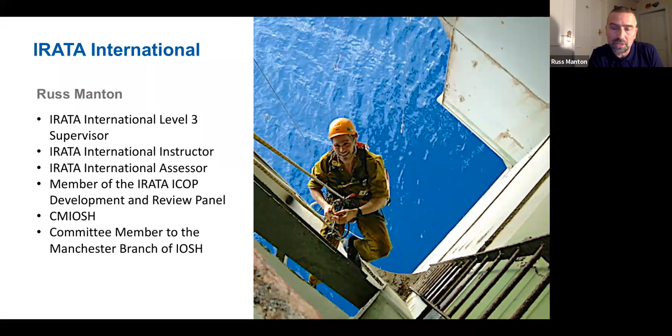So what is industrial rope access? Well, it's really an amalgamation of climbing techniques and caving techniques. That's what it's all about, really. And I've got to give the nod to the caving community here, because there's quite an important thing here.

I was told in the early days, with climbers, they tend to use their physical prowess to go up a rock face or a mountain, and the equipment is a form of mitigation. So it's there in case they fall. So they're not really using the equipment, it's only in case they fall.

Cavers, to progress around a caving system, are reliant on their equipment. Caving systems generally are full of water, running water, silt, mud, and are physically very difficult to climb. So they're reliant on their equipment to move around and progress. With that in mind, they became very proficient at going up and down the ropes.

What rope access has done is take that to one side and hone this technique, what's called single rope techniques, going up and down the rope, and they've added another rope with it, or a line as we call them, where we can put this attachment on in the highly unlikely event of any failure. Basically we've got this redundancy system.

So that actually ties in with the Work at Height Regulations. It actually comes under the banner of work positioning techniques. I'm not going to go through quoting all the regulations, but basically work positioning traditionally has always been about this fall arrest system, and we're adding a work positioning belt so we can go hands-free to carry out a job.

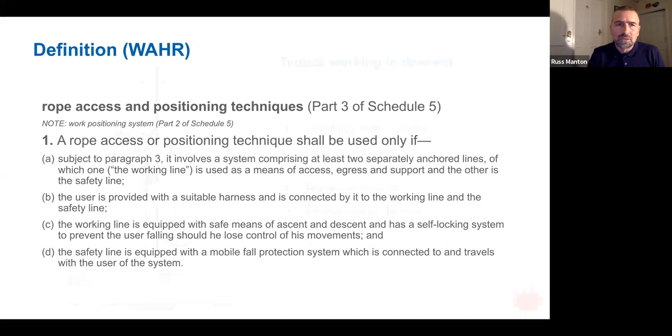It's a backup rope basically, with a device that will run up and down. And as I said before, in the highly unlikely event of any failure of the main working line, the backup system will kick in and arrest a fall.

Now, before we go any further, people think the rope access guys just go into the job thinking it doesn't matter if something happens, we've got the backup. The last thing you'd want is your primary rope to fail whilst you're hundreds of feet up on a structure and going into an uncontrolled descent. Sure enough, the fall will be arrested, but that's the last thing we want.

So with the actual working lines, we go to the nth degree to protect those so there's no failure whatsoever. That's why we say it's the highly unlikely event. We're putting these massive safety margins in. I've found myself in a few situations where we're working on two, three, or even four ropes to get into a position and put all the redundancy in place. It just goes to show how much we put in place.

So we've got working lanyards there, device lanyards, where we can actually attach onto the different lines, so if we need to move from one set of lines to another, we can get across safely while maintaining all these points of attachment.

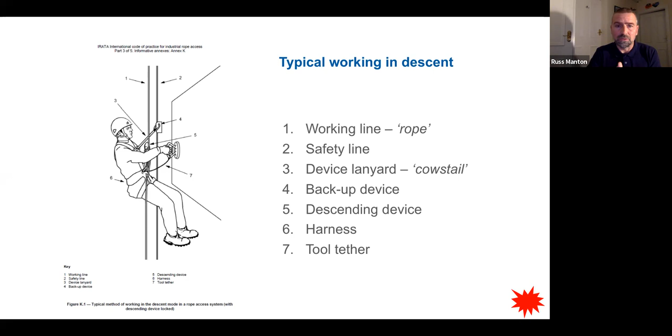So we might be working over water, we could be on bridges, oil rigs and things like that. We've got to be able to ascend up the ropes. It's not simply about just coming down the rope and doing a job, it could be climbing back up. Obviously if you're working over water, you're not going to go down into the water, so what we'd have to do there, we'd have to climb back up the rope.

So what we're doing is putting these two rope grab style devices onto the working rope, and we exchange the actual descending device over with these, a combination of actually two rope grabs. One's attached to the harness, one's attached to a lanyard, and in turn attached to a foot loop. So by using these combination devices, we can progress back up the rope.

And you can see just next to the working rope and the working line, we've still got the backup line. That remains there pretty much doing nothing, hopefully remaining inert, nothing will happen. But that's always with us in mirror image of what we're doing, going up and down. So the technique itself is called SRT, single rope technique, and the actual backup device has been included on top of that to give us this 100% redundancy. So we've got this complete coverage backup system.

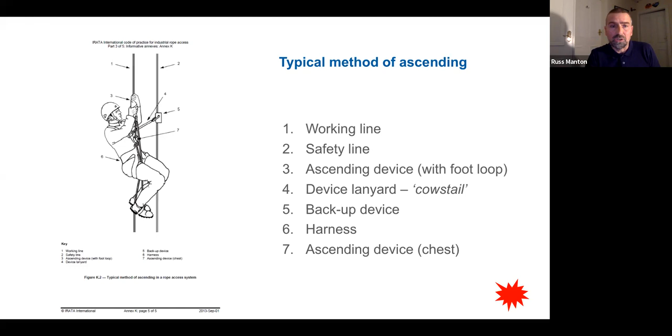Other harness-based work we can do, we're not simply just climbing up and down the ropes or moving up and down the ropes, we can traverse off the ropes. So we're using a technique here called aid climbing. What that's actually doing is it increases our repertoire where we can get to. So if a client came to us and said, look, we get down to this point, we need to go off sideways into a structure, then that's where we'd use this.

This would probably come from the climbing world more than the caving world, where if something's physically too hard to climb, we're reliant on the equipment to hang in. It puts us into work positioning. It's actually a very, very effective system. We're still using the two points of attachment, and in some cases up to two, or certainly three or four points of attachment when we're getting past obstacles.

And the beauty about this system is you're actually in work positioning all the way along, so you're physically not actually climbing the structure. In the highly unlikely event of any equipment failure, the free fall you'll receive, or an end user will receive, is going to be no more than 500 millimeters. It's actually tucked right down, so that'll beat any fall arrest system.

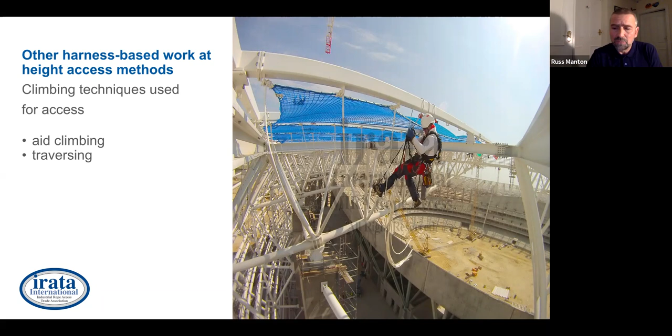And with this, predominantly we are traversing, I would say horizontal progression in a lot of structures. You can see it has been used on a stadium, but in some cases you can actually go diagonally, and basically vertically, any direction you want, as long as it's safe and you've got all the attachments there. Now this will use rope to actually get onto the structure, to move around, and at the end of the day we'll use the ropes to get back off it. But to say, it does really open up what we can do as an industry.

Also included in that, it's not just limited to abseiling, ascending, and the aid climbing I mentioned. We're using the more traditional methods where it's fall arrest, work positioning, and work restraint as well. So within the IRATA system, we're always working with this hierarchical approach, okay?

So with that in mind, the work restraint, or travel restraint as some people call it, is basically that will actually stop us going over an unprotected edge, and that's a really heavily used system. So when we're actually training this, and when we're actually using it on site, that's something we'd always go to. It's the go-to method. Obviously we're there in a place where we're using the PPE to do the job. It's already been accepted that we can't use other methods. We're using the PPE, and this is the first port of call to use when we're using a harness-based system. Work restraint will actually prevent a fall from occurring in the first place.

Sometimes fall arrest systems are used for the primary access, and it's basically just to get into position. And once that technician has got into position, then basically we'll set up a more improved system, or something a bit more permanent, semi-permanent, and effective to get technicians up and down into the structure.

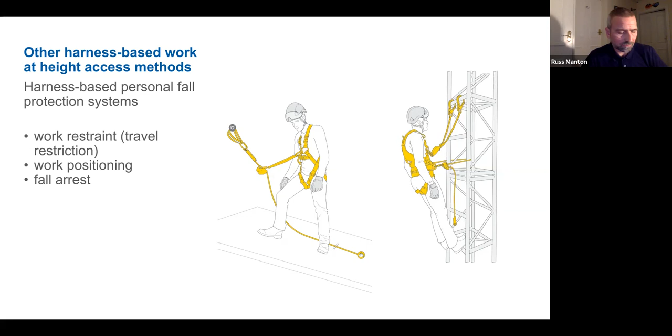Okay, so I like to use the words application specific. You've probably heard this in health and safety terms. The rescue you choose or pick for the job is dependent on the location, the type of work you're doing, and the environment you're working in. And we've got to choose that carefully, and that's down to risk assessment.

All technicians are trained in the basic intervention style rescue, and to be quite honest, that actually covers more ground than any. Most situations will find themselves in descent on a rope, and all technicians are capable of doing that. If it starts to get more technical, then obviously the team competence will have to be upped for that. But simply, we can't go into the job into a difficult location and not expect to get somebody out or evacuate them out. So that's why we train for these all the time.

The next one is this pre-rig system, or rig for rescue as we call it. So the difference between this and the intervention style rescue: in intervention, the rescuer will actually come down to the casualty, pick them off the ropes and take them down. With a pre-rig system, you're actually remotely effecting the rescue. So you can do it from a point of safety.

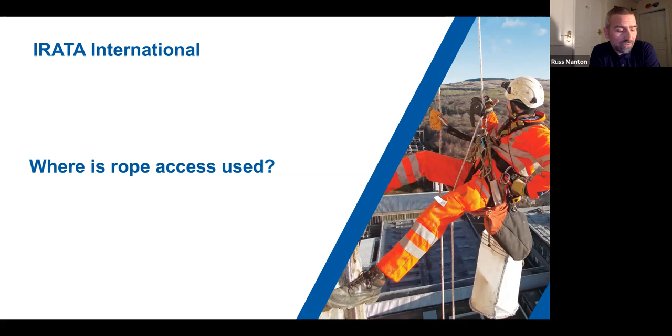One large example, as I say, we can actually compartmentalise our industry and where it's split up and how people are specialising. One big part of it is actually inspection. This particular slide here is a technician who's come down a structure and they're carrying out what's called NDT inspection, non-destructive testing. So this is something I've been involved in over the years.

Non-destructive testing is utilised in loads of different industry sectors. We can use it for offshore, onshore, bridges, aircraft hangars, boats, you name it. And what they're doing is actually coming down, as the name suggests, we're not actually taking samples, but we need to be there right at the structure to do this testing. So they're using ultrasonic methods, radiography, and we can actually tell the thickness of certain structures. It might be part of an inspection program and an inspection regime that they've got to maintain these structures, and that's a big part of rope access.

So you can see this technician has come down, locked off the descending device, and got into a work positioning location. They've got hands free to carry out the work safely, and they can get into a number of locations really quickly and safely as well.

Bosun's chairs is something that's cropped up over the years, and people ask why don't we use bosun's chairs? Because that's a very traditional method. It takes a lot longer to set up, and it's quite limiting in what you can do.

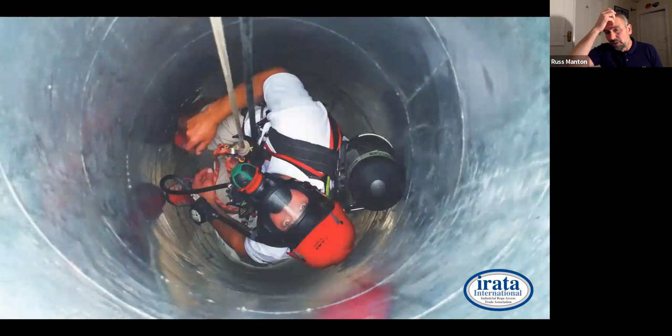Confined space works is something I do a lot these days, and rope access comes hand in hand with confined space. You can see this technician here has actually been lowered down with full BA into a high risk confined space. We can get that technician a lot further into the confined space and extract them a lot quicker as well, so we gain a greater range of what we can work in.

Added advantage of this, the whole team's fully versed in the equipment. They're using this stuff day in, day out. So when it comes to an emergency, they've got a complete understanding of the situation, and they'll all be able to swap around and use the equipment.

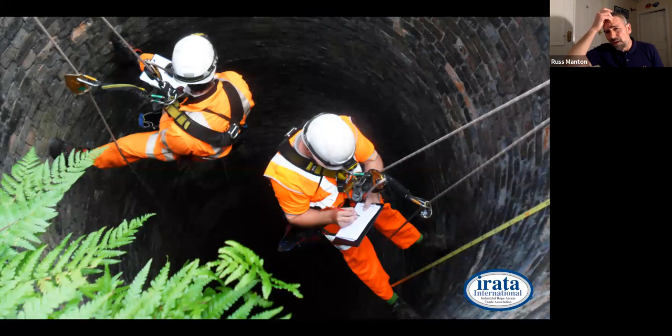Another example of confined space application with rope access is this ventilation shaft. A lot of people ask, why don't you use CCTV for this, or UAVs and drones to go into confined spaces? But there are still limitations. You've got these two abseilers coming in, and they can go down under their own steam, with control of the descent, unlike the picture before.

If you're going greater distances, it's probably a more efficient way of doing it, because these guys are qualified in what they're inspecting - they're engineers who know what they're doing, and they can control the rate of descent as they go down, covering more ground efficiently. Other advantages: they're next to each other so they can rescue each other, and they'll have a topside team as an additional backup to get them in or out of the confined space. It's not always about rescuing down - in a lot of cases, especially confined space, it's about rescuing up as well, so it's a very effective method.

Also, if there's any loose debris, an advantage is you've got somebody actually at the location who can remove that debris and perform a safety check while they're there, which is a bonus. Don't forget these ventilation shafts run right down onto rail tracks, and if you've got loose debris coming down on a moving train, that's a major issue. So that's one of the reasons we do these periodical inspections of the shafts, to make sure they're clear of loose debris - and we can remove stuff while we're there doing the inspection.

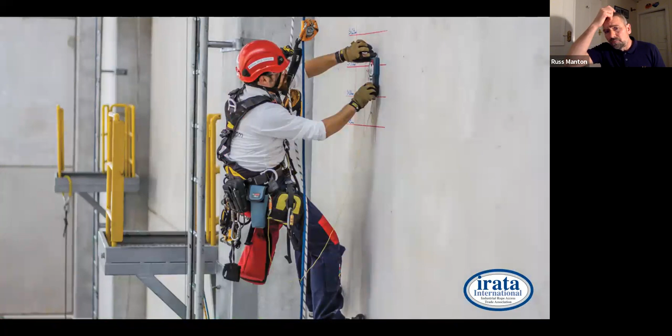Installation work - in this picture, this technician is installing something for a more permanent system to go in place. They can come in, put all the installation points in, and then the engineers can come in and simply install the ladder system that's going to go into place. You can see again, hands-free - they've got total control of the situation to carry out the work.

If you look at the slide carefully, you can see the guy's got this small seat. It's not exactly an armchair, but it provides enough comfort so they can stay there for a longer duration. Work positioning is generally designed for short duration use, maybe 20 to 30 minutes, but with the work seat we can increase that time, depending on what the technician's comfortable with. The work seats, or comfort seats as we call them, are mainly to take the weight of the technician out of the harness a bit more.

All the same safety systems are staying there - they're all rigged in with two points of independent attachment. So the comfort seat's really taking the weight out of the harness a bit, so we don't have any long-term physiological problems occurring with the technician. Other things - you can actually hang all the equipment off the seat as well, setting up a miniature sort of workstation, which is a quite useful way of carrying out engineering jobs and installation works.

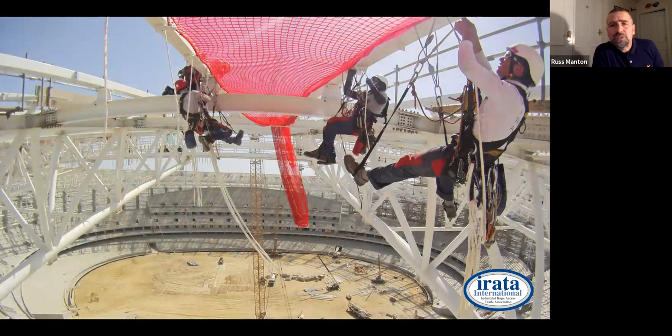Going back to the aid climbing here, this was a team of climbers that have come out onto the structure. What they're actually doing is putting safety nets in for a contract out in an Arab Emirate country. I think it's probably Qatar, actually doing a lot of stadium work out there at the moment. So they'll climb up, they'll probably use the ropes to gain access to the initial structure and from there traverse out. You can see they're taking ropes with them as an umbilical system so they can pass equipment in and out to the technicians from the ground below.

And also in the event of any rescue, we can actually get the technicians off. They're all working in close proximity. And what they're doing is setting up this more permanent safety system for other workers to actually come and do the roof. So going back to what I said before, we're actually working alongside a lot of more traditional access methods, helping and aiding to install these.

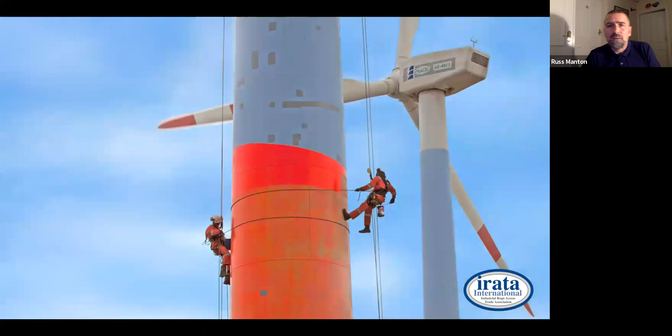Again, we've got another picture here. You can see specialist coating work going on to the wind turbines, actually on the tower itself. Now, this will be done externally as well. I've done a lot of internal and external work with this. Mainly, I was involved in fitting out systems or doing installation repair work inside the turbines in the early days when they first went up.

So we could actually climb up and then abseil down the inside of the tower, the actual wall of the tower. These technicians here have come down the outside. They're doing specialist coating work. Generally with turbines, they've got a 25-year lifespan, and they really start to earn the money after they've been up a few years. So the clients are really keen to maintain them. So, as I say, rope access has been a big player with this.

They're very difficult to actually access. Otherwise, there are cradle systems out there, but they'll take too long to set up, and they're not that effective at the end of the day. Plus, there are one or two huge cherry picker style devices, these mobile elevated platforms that are mounted on boats that can go out to the offshore platforms. But again, there's only a handful of them globally, and they cost a lot of money. So rope access is the next best bet, really.

So you used a lot of civil engineering here as well. So I'll go back to my point with the drones. I'm not knocking drone work in any way, but if anything, as I said, we work alongside drone teams a lot to actually look where we need to be, and then we're sending techs down on the end of the rope to actually carry out the work. Because more often than not, you actually need somebody at the end of the ropes to carry out the work.

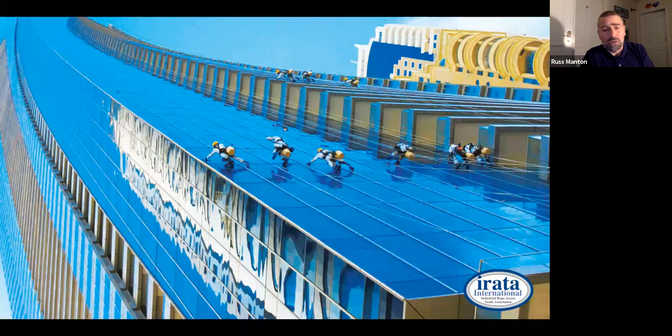Cleaning. There's quite a lot of companies get involved in this. Generally, modern buildings are equipped with BMUs, or building maintenance units, bespoke ones. So the Gherkin and buildings like that will have bespoke systems. They're really, really expensive to maintain. They can also break down, and you can get a team of abseilers in to cover. You can see that this team here in particular have actually covered quite a large area. So if the cradle system's out of use or damaged, you can get a team of abseilers in there to do the cleaning work.

Rope access does have its limitations here, though. I'll give it that. So you can't simply throw a rope off a really tall building and think, right, it's okay, the abseilers can come down and they can get the lift back up. It's not quite as simple as that. When buildings start to get to a certain height, or the abseils start to get to a certain length, the ropes themselves will have a limitation. It's not a safety thing, it's more to do with we just lose efficiency. The ropes elongate very slightly, a very small percentage.

So if you've gone for over a 150-meter drop on a building, 200-meter drops, which I've done myself, you'll start to find the rope elongating. Plus, if you're pushing against the side of the structure to clean it or carry out whatever work you're doing, you find yourself very quickly drifting away from the building. So you end up really fighting against that and having to use other techniques to keep attached to the building to stop you drifting away. As I say, it's not a safety issue. We're on two points in suspension, but it's to actually keep us at interface with the building to carry out the work. So that can slow us down somewhat.

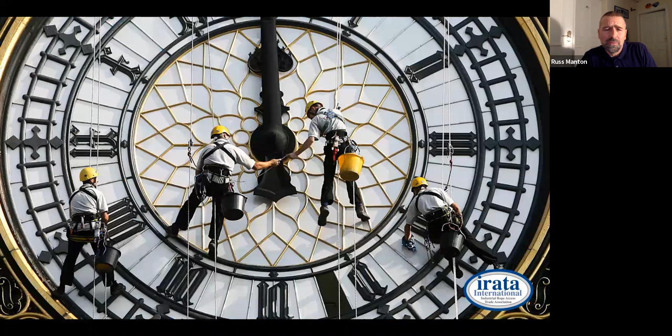I mentioned before about the setup time. It's very quick and easy to set up. It's not invasive whatsoever. And the equipment we're using is really lightweight. There's a lot of alloy components, and these abseilers are not the biggest guys, so they can just basically come down very gingerly, come across the clock face then to carry out intricate work on structures like this. So again, that's been a bit of a bonus.

There's just a few examples there of how we've used it. Obviously, it's used in the entertainment industry and things like that as well. There's lots of different applications. It's just to give you a bit of an idea. So IRATA, I'm going to talk about this, the body behind it all, what their involvement is, what they're about.

So it's the Industrial Rope Access Trade Association. It's a trade association that was set up initially by the initiative of the companies that were doing rope access back in the early days, in the late 80s. They had to set this trade association up to kind of govern what we were doing, set up a syllabus to work to, set up a set of guidance and industry guidance notes that we could work to.

So the structure in itself, it's mainly made up of committees. It's a non-profit certification body. We've got a committee chairman, various committees there for training, health and safety committee, equipment standards committee. We've got the executive committee as well, the overarching committee which makes the decisions. General manager and secretary. The head office is in the UK. It's based in Kent, where all the administration is carried out, worldwide operations, for all the member companies worldwide.

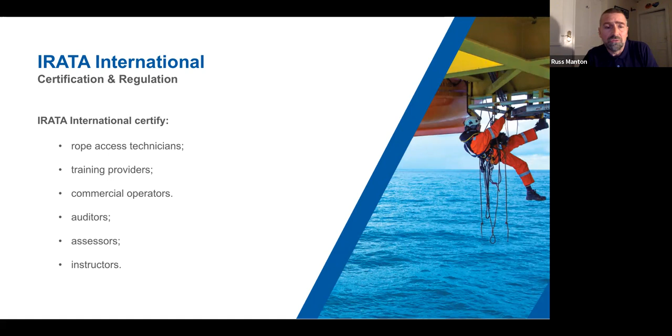Objectives of IRATA: obviously promote and maintain high standards, the work quality around the globe for industrial rope access, promote continuous improvement and education, again through their website. They do a lot of videos and publications that they put out there on the website and disseminate around all the member companies. Increase awareness of the advantages of rope access. Promote the advantages of using IRATA certified companies.

And currently they're actually working towards the ISO standard 17024, which is to do with certification. So they want to get this ISO accreditation as a certifying body. That's been worked towards, and we're almost there with that, getting that over the line. So they're continually supporting the industry globally, working with government bodies, providing advice to industry.

Got very close links to the HSE within IRATA. We've got a couple of HSE guys that actually work with us. So we've got a very good working relationship there. The British Standards Committee as well. The chairman is currently one of the core members of PH5, the Equipment Standards Committee for personal fall protection equipment. So we've got close links there.

And again, the information is coming backwards and forwards with these committees. I know they get involved with a lot of events for health and safety, HSE-based events, predominantly for the work at height side of it, but obviously they get involved with all these events.

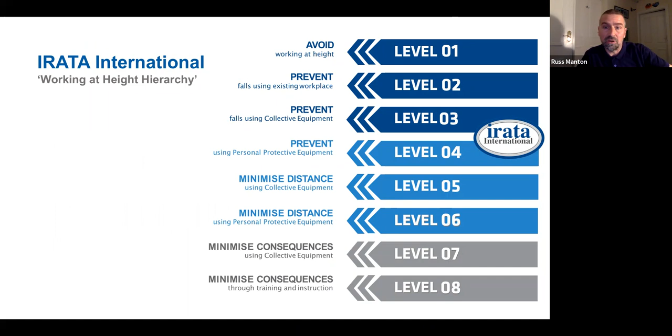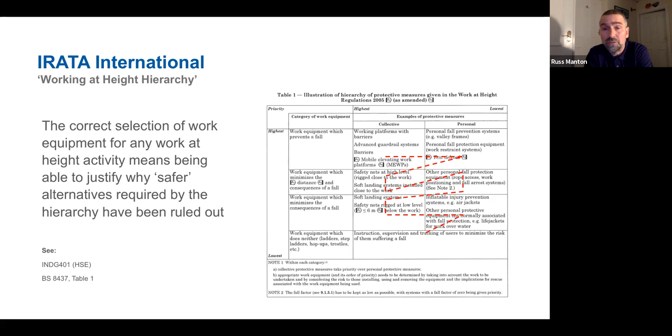Tied into our code of practice, which we'll talk about in a bit more detail in a sec, it actually states in there, and this ties in with the BS 8437 selection of work equipment code of practice, that we've got to look at all other means of access. We've got to justify why safer alternatives have been ruled out before we use rope access. We can't simply just shoehorn it into the equation. We have to do a very careful risk assessment and look at all options. Usually when we're brought in, as I say, it's for the snagging work or for when it's just simply impossible to use other methods. So we're up there with a harness, sticking to our hierarchy.

So the evolution of rope access, where we've got around the globe, it's come a long way. Back in 1988, there were 6 companies in the UK. That was it, working out in the North Sea for the oil companies. Now, presently, we're looking at 606 certified companies globally. You can see a lot of them around Europe. You can see the spread all the way around the globe there, operating and training for that matter.

So as I mentioned before, when I was assessing, I've seen this firsthand, the way it's actually migrated across the globe, the effectiveness of it, how IRATA has stayed on top of it. It's been one of its success stories. We've got this from Europe all the way to the other side of the world, and it's working wonderfully, and everybody's working to the letter. It's not been modified in any way. It's not been adapted or changed. It's actually working as it should be at the other side of the world, which has been a really good thing for me to see, actually.

The code of practice we've got actually superseded a document which was industry guidance back in 2010. There was a colleague of mine called Paul Seddon. He was awarded an OBE for the work he did with the standards committees. He's been with us for a long time. He's just recently retired. This international code of practice was brought into place to supersede this industry guidance, and it's a very, very detailed document, really comprehensive, with illustrations, informative annexes, all the relevant legislation that we've got to adhere to.

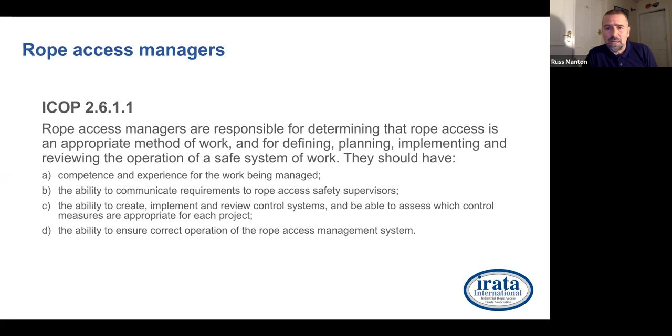And when it comes down to supervisor level, you can see again a very comprehensive set of requirements. They need to fully understand what they're doing. I'd say be mentored correctly, taking time to actually be nurtured into that role, because you go from being integrated in the team, and all of a sudden you'll be in charge of a team. Now it's actually mandatory to have a level 3 on site.

So if we're working with a team, for example, these vary. It depends on the site, but it's a minimum team size of 2, for obvious reasons on the rescue side of it, one of which has to be a level 3. Offshore oil and gas, traditionally they always used a 3-man team or 3-person team. You'll probably have a level 1, a level 2 technician, and then you'll have a level 3 supervising that.

Onshore, it could be any team size. So we allocate these supervisors to be appropriate for the site. Say a football stadium, any construction work on that, you could have 60, 70 technicians working on that. So you'll have multiple supervisors in sub-teams that will be overlooking what they're doing, and they're completely responsible for that team, looking out for them.

And they've got to be empowered to make decisions to obviously stop the job if it falls outside the method statement, or if there's something not correct there, it's outside the scope of the works. Could be damaged equipment, for example, or something's not quite right. Now, all the team will make that call. They do the pre-use checks and can actually flag it up and give it to the supervisor. But ultimately, the supervisor has got the power to go, yeah, we're stopping work. We need to withdraw equipment from service. So these are the kind of responsibilities they've got.

On top of that, the ICOP, the other main document we've got within IRATA is this training certification scheme. Before that, we had what's called a general requirements. Again, a very small document which outlined the syllabus, what we had to work to for the technicians. But the training certification scheme is a lot more comprehensive. It's moved on from that. It includes a lot more.

So there's obviously all the syllabus for IRATA level 1s, level 2s and level 3s, but also for the trainers, the training companies we mentioned before, they've got to meet a certain criteria. The assessments and assessors as well. The whole criteria is detailed in there, and we've got to stick to that to the letter as well. That came in 2014. And again, that's something I've been involved in, making sure it's been translated out there into the big wide market.

If you've never done any sort of climbing or caving, it can be a bit of a shock to the system. You do a minimum of 4 days training, which is mandatory. You can take it over that, but 4 days is a minimum. And then you're independently assessed by somebody like myself to make sure that you meet the competency requirements of the syllabus. It's quite a robust system, I've got to say. It's very rigorous. It's a very physical course. It's very technical as well. So there's a lot going on. It's very practical based as well.

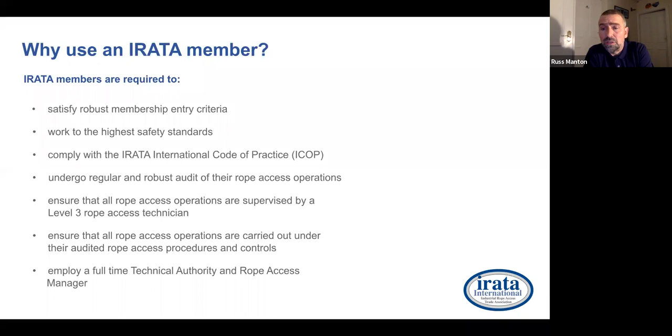And then they'll employ a full-time technical authority and a rope access manager - somebody allocated that role within the company, so you've got a point of contact there you can liaise with straight away.

Checks you can do on companies: whatever qualification, if you're qualifying as a technician or a member company for training or operational, you'll be allocated a serial number, for want of better words. You can do these checks through the IRATA website - a background check. If you see a company coming in brandishing the logo, you can do a background check using their serial number.

You get these smaller companies who actually specialise in that, who are our IRATA members, and yeah, they do exist. The technician search, we've got that in place as well. So first and foremost, each technician has got a certification to back up what they've done, the qualification. They also carry not just a logbook for logging the hours in, but they've got these CSCS-like photographic ID cards, which have the hologram in the back, just to verify who they are. And background checks can be run further through the IRATA website.

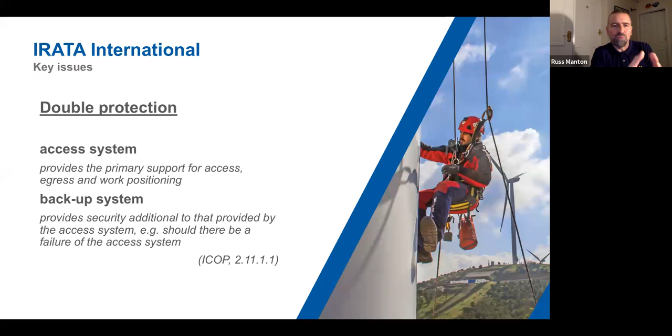So key issues, one of IRATA's roles, the double protection. That's a constant thing we're drumming out there, set in stone. To be fair, I've never come across anybody working on single points of attachment myself, thankfully. But that is one thing that's constantly forced out there. We're force feeding it to all the member companies and anybody involved in rope access: double protection, independent protection. So you might have two attachments, but if it comes back to one point, that's not good enough. We're talking about two independent attachments all the time.

Anchor strength. Again, the requirements for that is something we're pressing home all the time. It's got to be unquestionably reliable. It's got to withstand 15 kilonewtons of force applied to it as a minimum. 15 kilonewtons equates to roughly 1.5 metric tons of weight required to move it. That's a lot of force, but that's the minimum we work to. Those safety margins are what we deem safe to work with. We wouldn't go ahead if we can't quantify that anchor to be that strong.

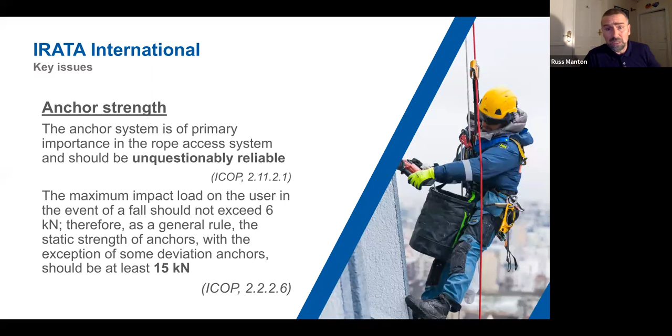The knots, it goes without saying, they've got to be fit for purpose. We don't go in showing off our huge array of knots that we've learned over the years in climbing. We use a select amount of knots, which is documented in the ICOP, which is quite important to take on board, and all technicians are aware of the knot strengths, the limitations, when we shouldn't use them. We only use a small selection of knots, maybe 5 overall. I would say 3, to be quite honest, are the most common ones. But without going into them, all technicians need to be aware of that.

Obviously, level 2s and level 3s have got to be fully versed with recognising them, tying them, making sure they're dressed correctly at all times. In effect, knots are the weakest link in the chain. So I've talked about the anchor strengths being 15 kilonewtons. We've got these double points of attachment. The ropes themselves, a sewn terminated rope, is 11 millimeters. It's a nylon construction, super, super strong.

It'll probably take in excess of 3,000 kilograms before they break. I've actually seen it firsthand - we've destroyed a lot of these in test centres. They're strong, but as soon as you introduce knots into them, they actually weaken the strap and take them down.

IRATA's interpretation is that as soon as we introduce knots in the rope - and we have to, because we've got to terminate these ropes onto anchor points - then we just assume that the rope strength has actually been halved overall. So as I say, it's the weakest link in the chain. But even without taking that into account, you've halved the strength of the rope, and then what we usually do is take a fifth of that to ascertain a safe working load.

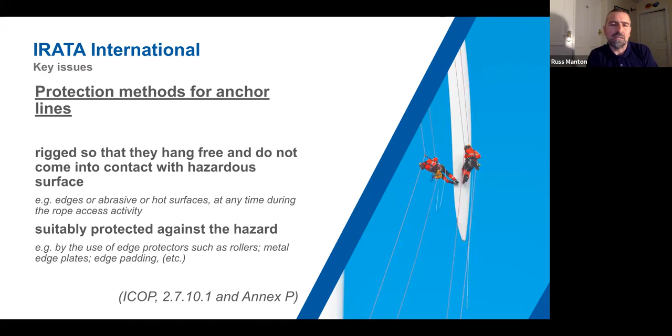If I bring it to the next slide here, we've got this hierarchical approach to the protection of the ropes. So the ropes are really strong - they are nylon construction, kernmantle construction, so you've got this core of inner strength with a sheath protecting them on the outside.

They are super strong, but as soon as you put them against a hot surface, an abrasive edge, or a sharp edge for that matter, it's just going to be like a hot knife through butter. It'll go straight through, especially with weight applied to that rope as well. So this is why it's of critical importance that we protect them.

With the hierarchical approach, what we do is very careful hazard identification on the site. We'll do a site visit prior to any work commencing, looking at all potential things the rope might come into contact with. We're going to remove that hazard if possible. If we can't do that, we're going to rig to avoid any contact. And if we can't do that, the last port of call, we've got to put rope protection in place.

Now, in a lot of cases, if you're on top of a bridge, building or something like that, you've got nothing above you where you can rig to take that rope further away. So you actually are running the rope, say, over a parapet edge. We've got a lot of stuff now on the market - Kevlar, special edge rollers - that we can put into place. So there's no excuse to use something makeshift. We shouldn't be doing that. That shouldn't be happening.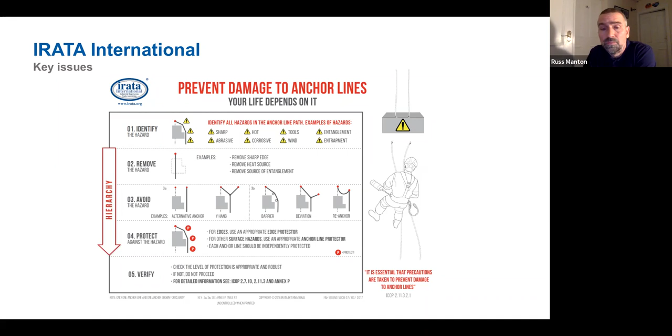That's something we've got in place at the moment - we've got some really good rope protection. As an industry, we've probably got some of the best kit we've ever had now. It's out there in the marketplace.

Dropped objects, again, coming from a climbing background - a lot of my colleagues will actually back me up on this - but if we drop something out in the mountains, it could actually be a life-saving piece of equipment we're dropping. So we treat it very, very carefully about keeping stuff attached all the time.

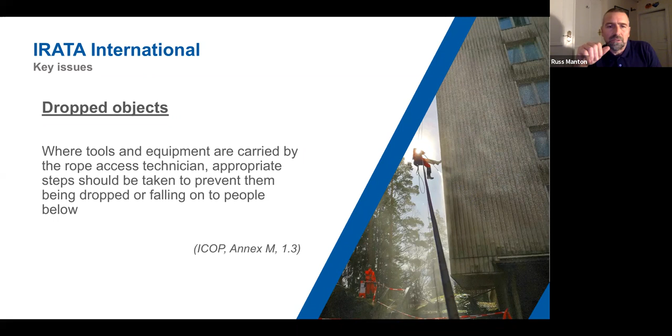And we're trying to educate the general masses as they say, whether doing rope access or any work at height for that matter. Again, we've got this poster campaign going out there, educating people. We do constant safety bulletins as part of the toolbox talks. These will always, like the anchor line protections, involve talking about the ways or approach we need to take to actually control this.

I tend to find that if we're actually using tools and equipment on the ropes, we've got these engineered controls along with the administrative controls, along with the PPE as well - it's usually all included on the work sites there for the dropped objects.

Also take into account wind carry as well. So obviously if some of these structures, if something is dropped, it could be taken quite a large distance. So again, these things are actually factored in with exclusion zones. That's how far our planning actually goes ahead with this. And then we'll probably employ sentries at the bottom of that as well.

So, you know, even working on a wind turbine in the middle of nowhere, we've still got a duty of care to people, and we've got to be aware that somebody could be walking under a structure. And you can bet your bottom dollar if somebody's hanging off a structure, members of the public will be drawn to that and walk over and go, what are they actually doing? Is that some sort of circus act? So we've got to be mindful of that. We can't just write them off. We've got sentries there to make sure that nobody comes near these massive exclusion zones.

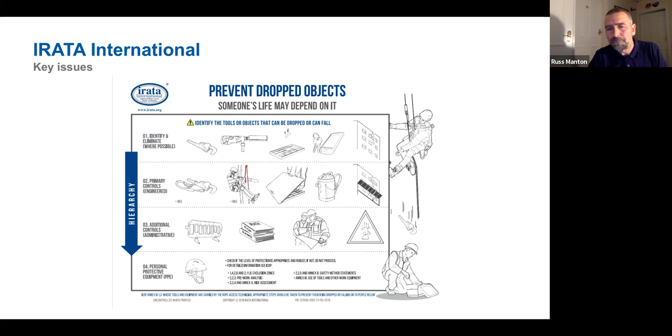Another thing IRATA gets involved with is this work and safety analysis. So this is where all the information is fed back to Dr. Chris Robbins, he's actually ex-HSE, and he collates all the information. He puts it together, all the hours performed on rope access around the globe from all the member companies, and looks at all the statistics from near misses, incidents and accidents as well. So we basically can learn from that, look at the problem areas.

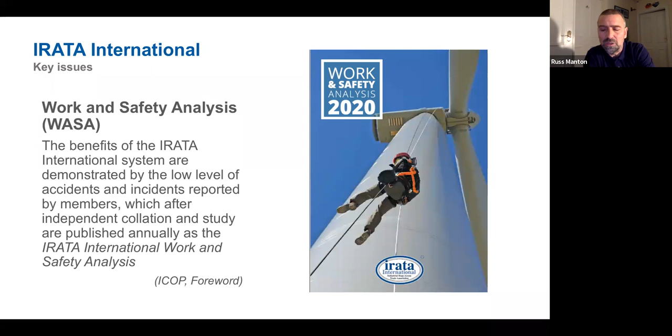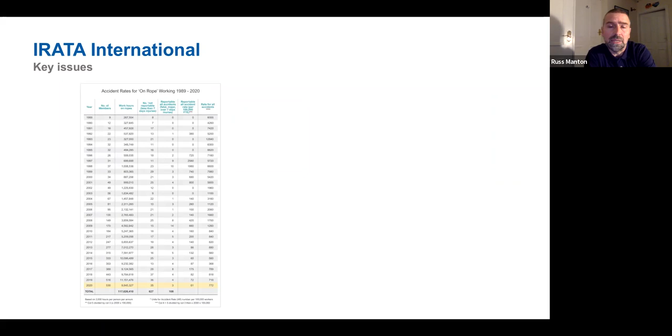We'll see for this next slide here, we've got the accident rates all the way through there. We've collated from 89 up until last year, and all the areas that are causing the problems. Obviously dropped object, on rope error there, third party acts or omissions, rope damage is all in there, and that's broken down into the report.

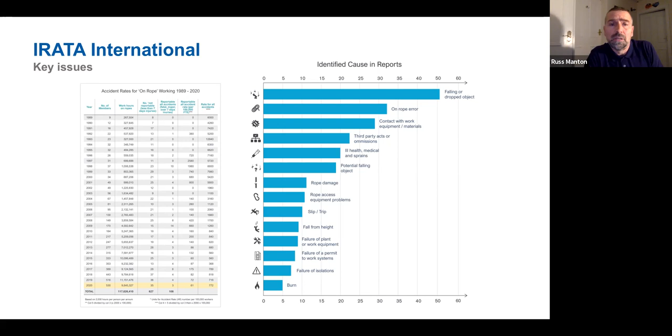So we can actually see, not hypothetically how it's going to perform, but actually see in arduous environments how they perform as well, so we could learn more about it. And that information is also documented and fed back out into the industry.

Thankfully, in industry, certainly rope access, we had no incidents at all whatsoever with suspension syncope. It does remain largely hypothetical, but it's not to say we're just going to sit back and let it lie. We'll obviously carry on working towards that, trying to resolve that matter and take all measures necessary.